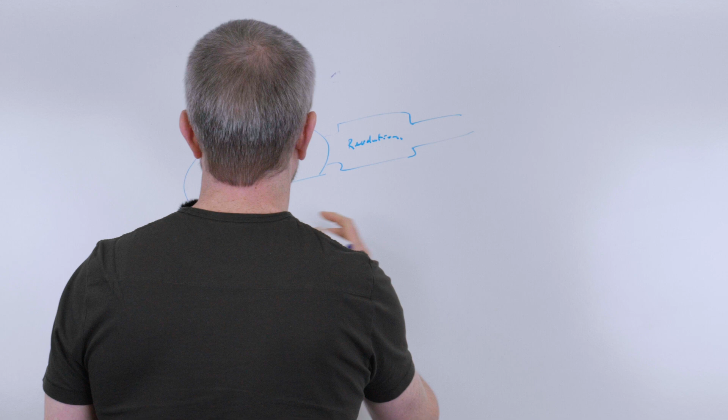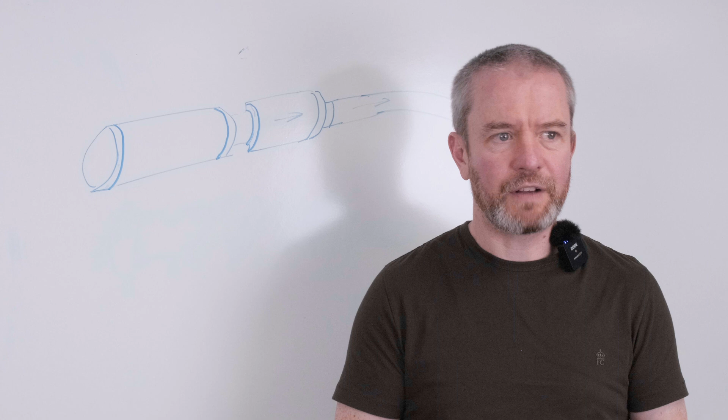At the core of every single one of our carbon filters is a miracle material, virgin activated carbon. The actual carbon holds 3 times more air than is actually in the atmosphere around it, just as it sits inside its carbon filter. And it has the fantastic properties of removing volatile organic compounds from air, as well as sound absorption. So carbon filters inside your room would be attached to a fan.

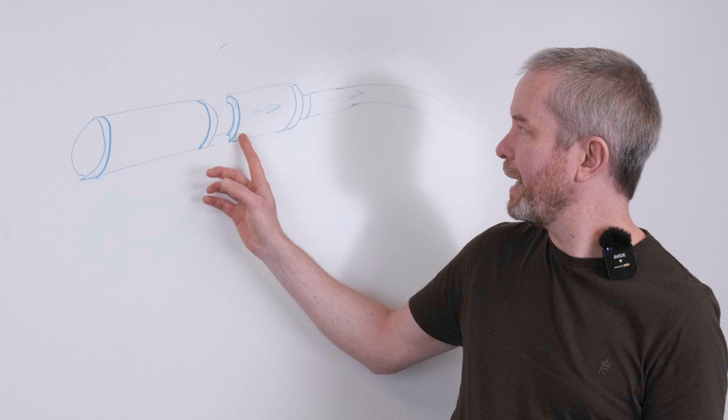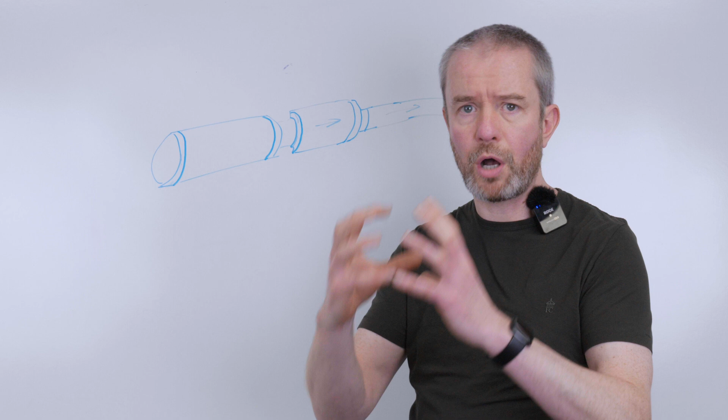As a fan sucks the air through the filter, the air pushes through the sides, and as it hits the carbon, any larger molecules such as volatile organic compounds that create smell attach to the surface of the carbon. The surface area of the carbon is an astronomically large number that is hard to even think about. But as the air travels into the carbon, it bumps along and any large molecules will be adsorbed onto the surface. A small chemical reaction happens between the carbon and the large molecule, which holds it in place until it breaks down and disappears and goes back out into the atmosphere, at which point it won't smell anymore.

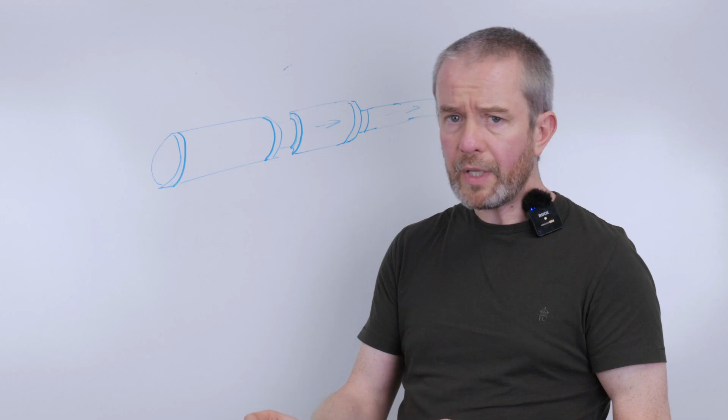The main difference between the different filters that we sell is the size of the carbon that's in the filter. Some filter beds are smaller and have finer carbon, some are bigger and have larger carbon, which means we can have longer life or easier airflow depending on what type of filter you want to use.

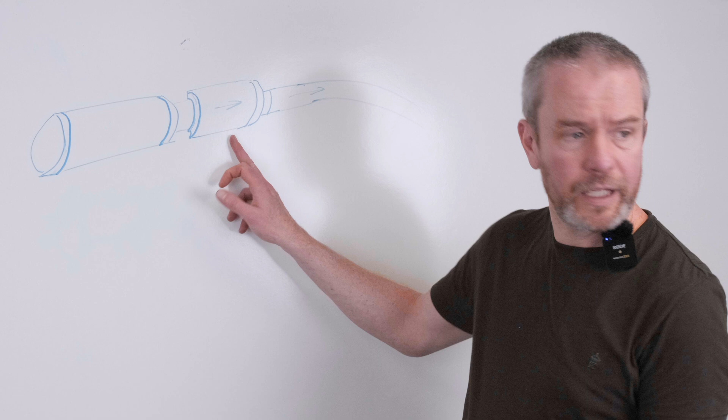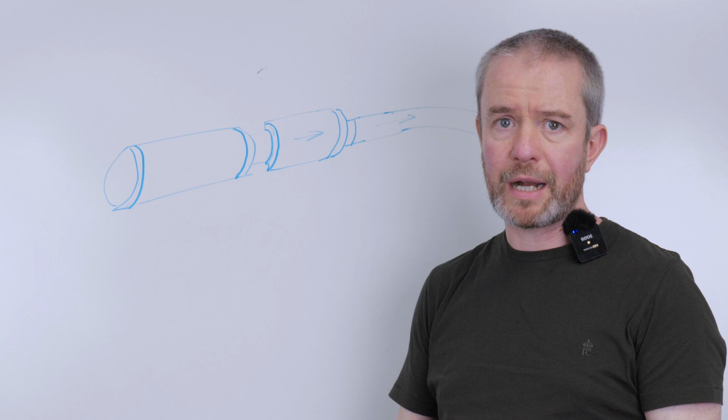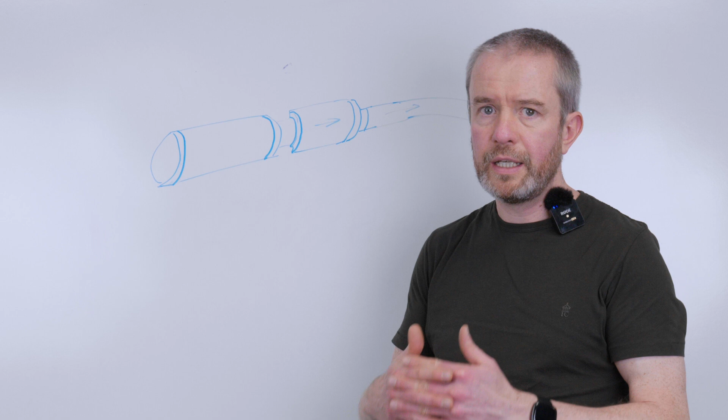The best way to match your fan and filter is to look on our website where we've done it for you. Particularly with the Systemair and CarboAir filters, it's an incredibly accurate process that's tried and tested. We've also matched up our Rhino fans with Rhino filters and the Hyper fans with Phresh filters. The best possible way of matching up the two together is just to go on the website and check out what we've done for you already.

These filters were introduced around 5 or 6 years ago from a Dutch manufacturer who's been manufacturing filters well over 30 years. I chose that manufacturer because he created some of the best filters. He'd been in the game longer than most and his carbon is always bang on.

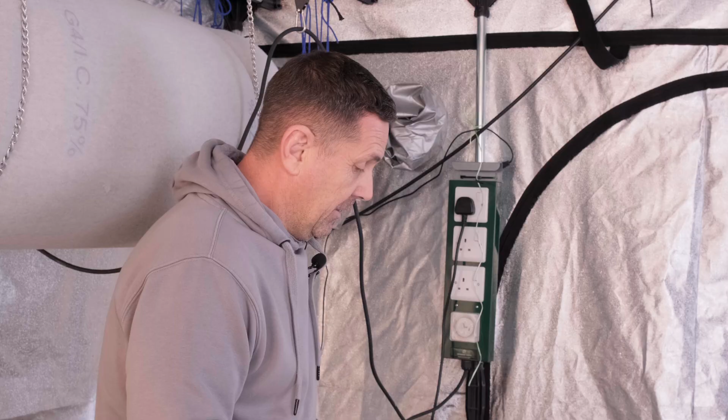So the difference between CarboAir filters and a lot of other filters on the market is basically how they're made. A European filter will always have a really fine mesh, where a Chinese carbon or a Chinese filter will have bigger pieces. That's just the way they've always made them. The European filters always look for a small mesh.

CarboAir filters use a special kind of carbon. It's like a wood-based, coconut-based carbon, where a lot of the other filters on the market use a coal-based carbon. The reason we use a wood-based carbon is basically because it becomes super, super porous and it's really, really light.

It's really big on volume. So when you're filling a big filter like this with wood-based carbon, the volume's huge, but it makes it really, really light and really easy to use because you can handle it a lot better. Also, the wood-based carbon is really porous, so when you're putting a lot of airflow through the filter, the carbon will attract the organic compound and trap it in there. The more airflow you put through a CarboAir filter, the better it works because it penetrates deep into that wood-based carbon.

Nothing wrong with coal carbon-based filters. To be fair, a coal carbon-based filter will handle humidity better, but it will reduce your fan's airflow by about 15-20%, where these don't really reduce your fan's airflow because the pressure is a lot easier to pass through the carbon. A coal carbon filter will be heavier and reduce your fan speed. So if I'm running a CarboAir filter on a 6-inch fan in a normal room, that'll be fine. If I take it out and put a coal-based carbon filter on, I'm going to have to turn that fan up or go up one size to get the same amount of air volume out of the room. These filters allow a lot of airflow through.